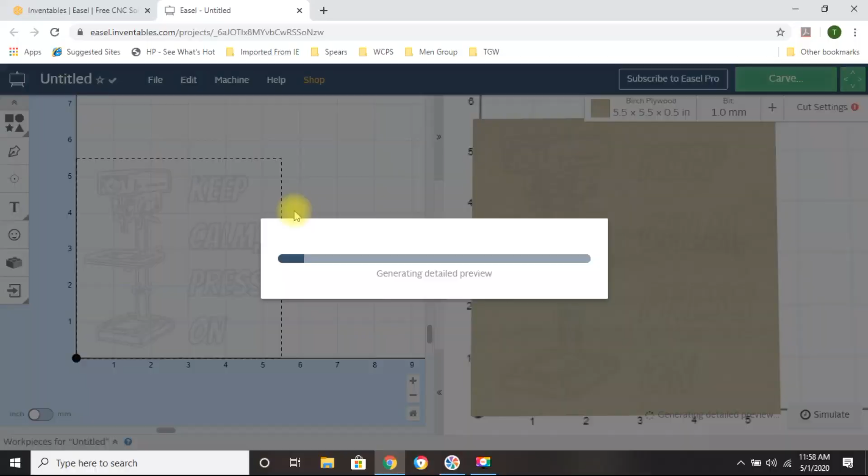Detailed preview. So yeah, that's what it will look like when we go to cut it. And so if I were to go ahead and carve this, what I need to do is, you see how it's got a red exclamation point? Excuse me.

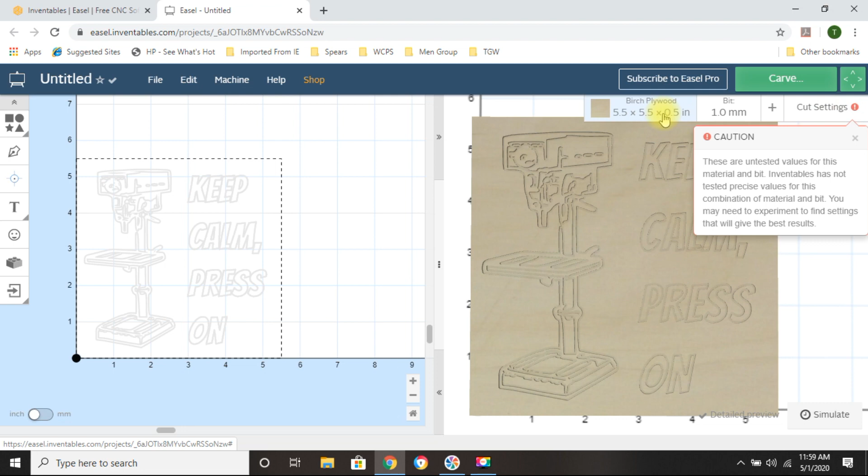So what that's telling you is that Easel says the values that you have in the boxes are untested, and so they're just saying, hey, you might want to look at this because we don't know what bit you're using. Whereas if you use one of the suggested bits that Easel has, say we were going to use the 1/8 inch single flute end mill.

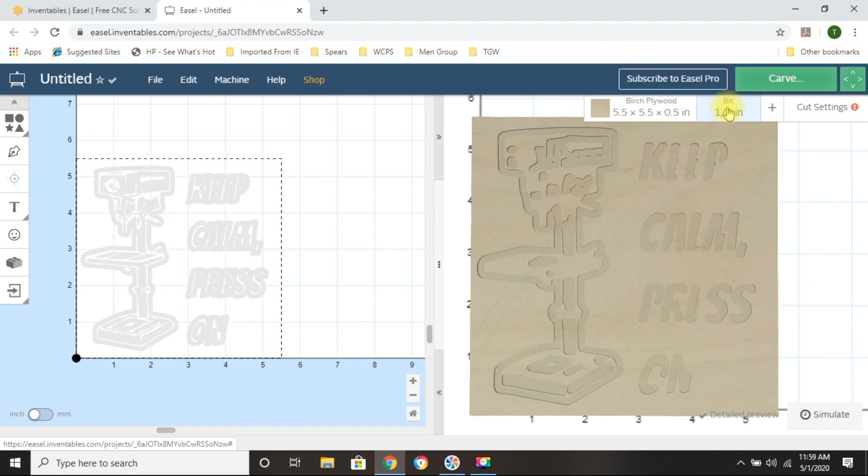Yeah, you see how, yeah, that ain't going to work for me. Still there. Yeah, it's telling you that it's not liking the bit, but I always just put that as 1mm, and then I come in here, and so if you're using a Pro 3018, these settings are meant for big machines. The Pro 3018 can't do this. You're gonna burn out your motor and break your device.

So you come over here, you click on the custom part. I usually back this down to about, let's go 20. I usually cut this in about half, but I will put it at about, let's do 4. Why not 4.5? Why not? And then the depth per pass, I usually keep where it's at.

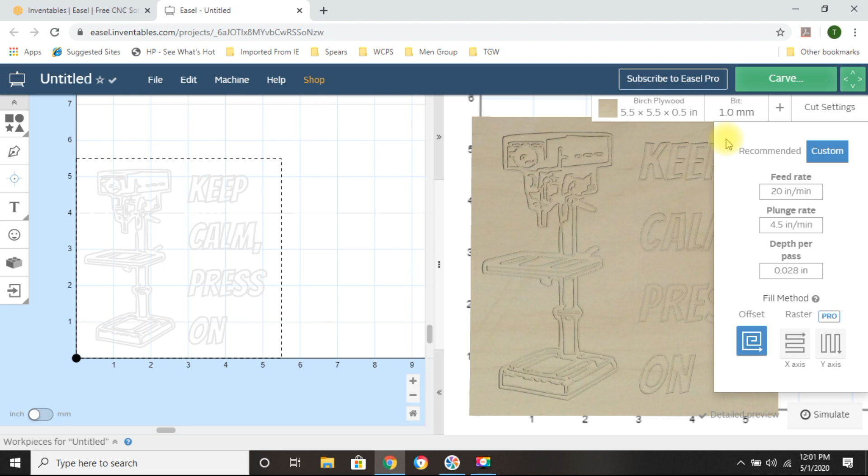The next thing you can do is you can decide if you want to use offset, so it starts in the middle and works its way out, or you can have it so it just starts on the x-axis and goes all the way and comes back. I usually just leave it as offset, and then the y-axis where it would go up and down, you got to pay for that. So yeah, that will do that. So we're going to keep our customs.

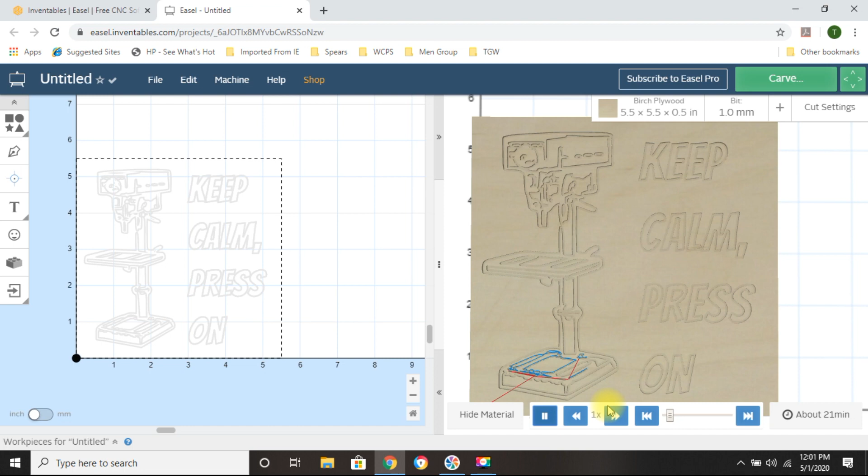Now next thing you can do is simulate to see how long it's going to take for this to cut. So it's saying about 21 minutes. You can actually play how it's going to cut. If you want, you can speed it up to see exactly where the tool is going to go. Let me speed it up. So yeah, this drill press has a lot of detail to it, but it looks really cool once it's all done. And boom, it's all done.

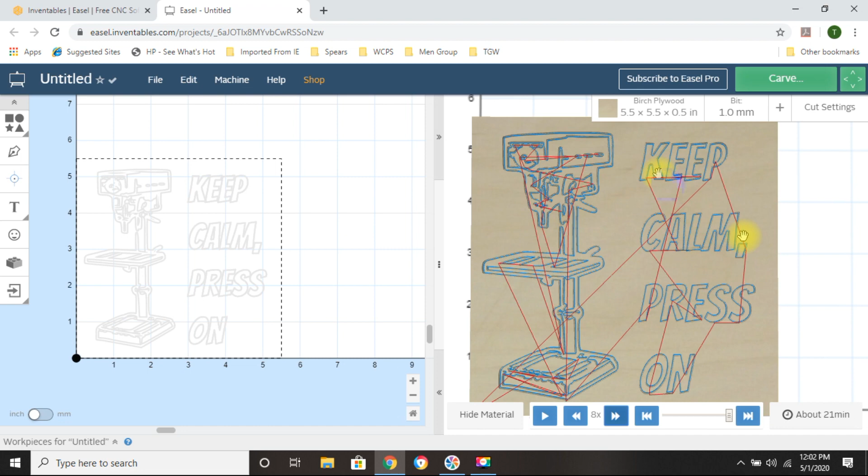Alright, so if I wanted to go ahead and carve this, I would go up here and click carve. Now I don't have anything on my CNC machine, but I'm still going to show you. So you're going to measure your material. You're going to make sure that the material is the exact thickness. I usually just put 0.5 inches. The material is actually 0.75, but once again, I'm not cutting all the way through, so I just put it as 0.50.

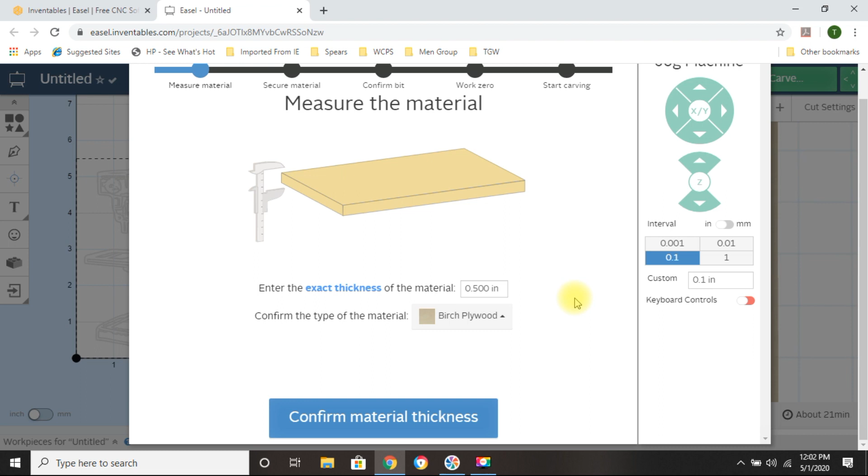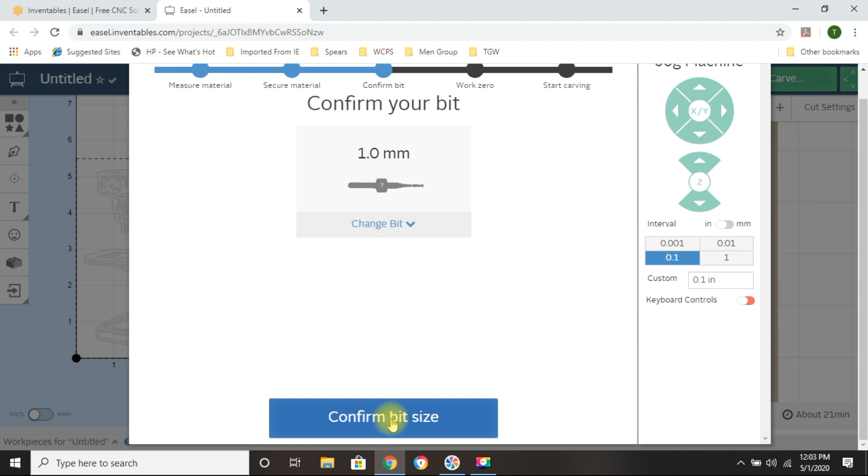Make sure your material is secure. Once again, it's going to want you to confirm what bit you want to use. We're using a customized 1.0mm bit. So you can confirm your bit size. And then what you'll do is you'll jog the machine to the lower left part of the material, and that's the work zero.

Once you got that, you can confirm. Oh, this is where you can determine how much you want that single jog to do. So you can have it move just very little. You can have it move a whole inch if you wanted to. I usually start off with 0.1, and then once I get close enough, when I do the Z, I'll go down to 0.01, and I'll really get it right to where it's touching the material. So, all right, back to what we were doing, squirrel.

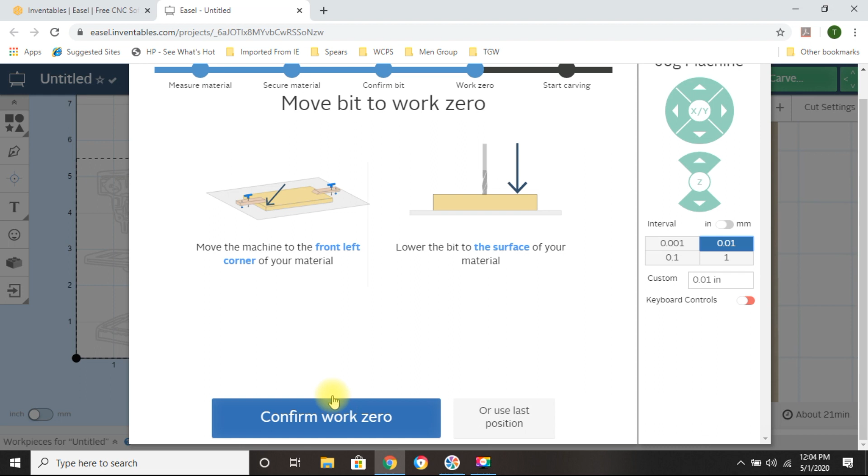Confirm work zero. So then you're going to raise the bit. You're going to tell the machine to turn on the spindle. And you're going to indicate that the spindle is on. And then when you're ready, you click carve. But like I said, I don't have any material on there. But if I were, it would start carving.

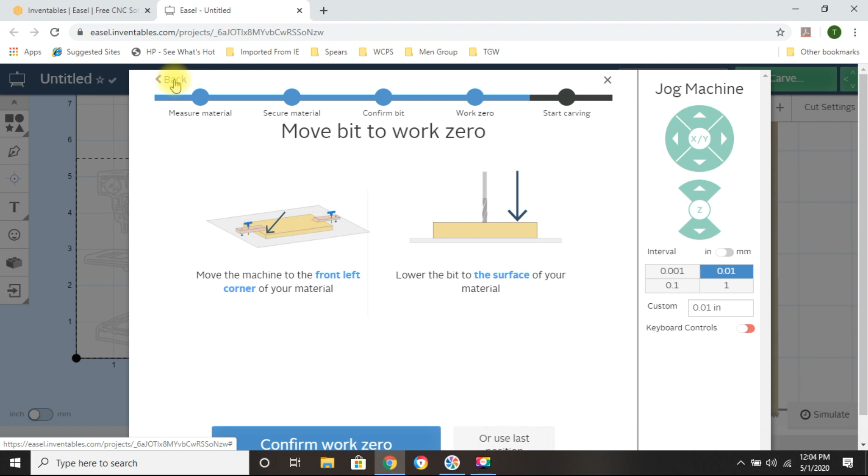Now, if you make a mistake, say you need to go back, you just go back to where you believe you made a mistake. And you say, oh, wait, my material's not secure. All right, material secure, confirm bit size, confirm work zero.

Why didn't you turn off? This is unedited. There it goes. But you can go back and say if you're not at the start carving point and you make mistakes from here, you can go back and the machine won't continue to run like it was. But if you need to shut it off, just press the X button.

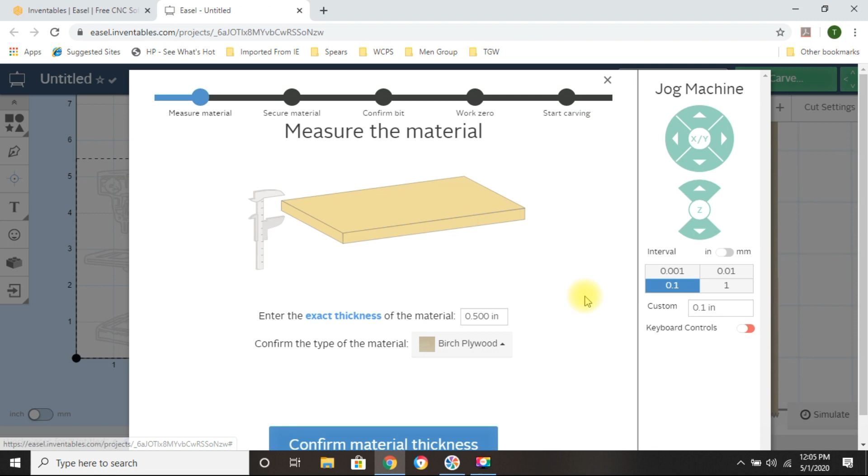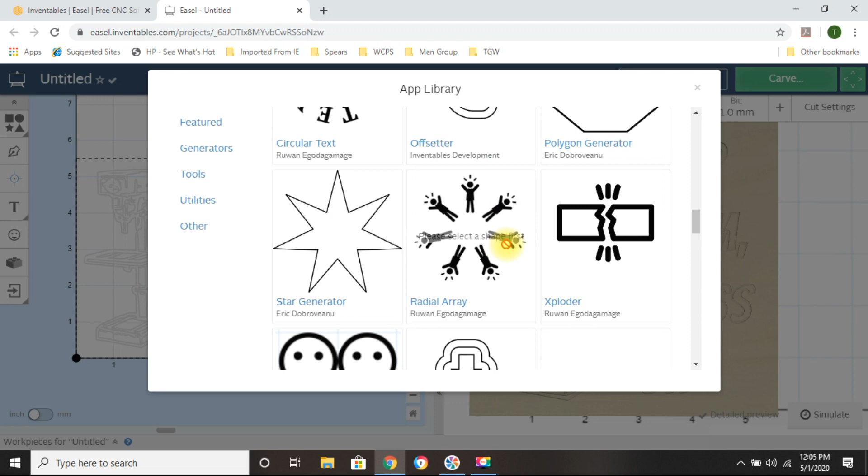So that is just kind of the basics of bringing in an image into Easel and setting up how you want it to cut on your project. The other options that you have with Easel, I've done a few. I've played around. They have different apps that you can use, and I've done the border one where you type in. Let me find it. Equal spacing. That's a good one.

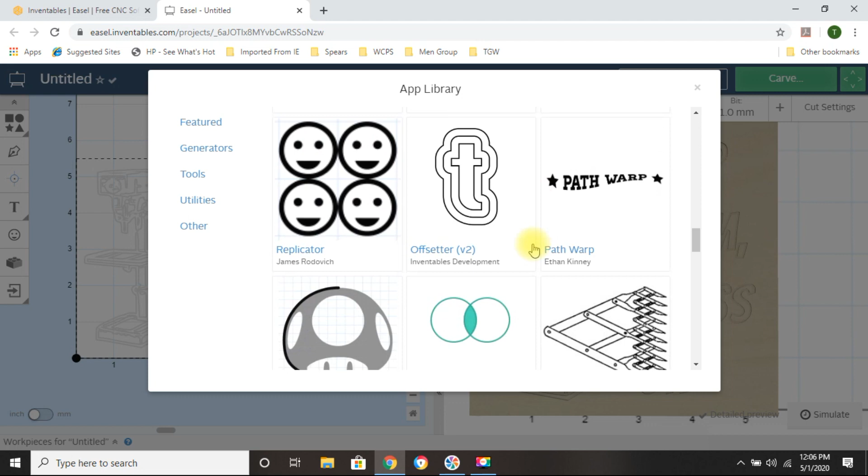So say I wanted to make sure that this right here has equal space. Say I were to do the words individually instead of doing it all in one text box. What I would do is I'd go to apps and I would come down here and I click equal spacing, and like I said, if it wasn't one text box, then it would have all the letters or the words listed, and you can tell it, okay, I want the spacing direction either vertical, horizontal, or both, so you want it all lined up. Spacing type on the center, space between, and then you can add additional spacing if you want.

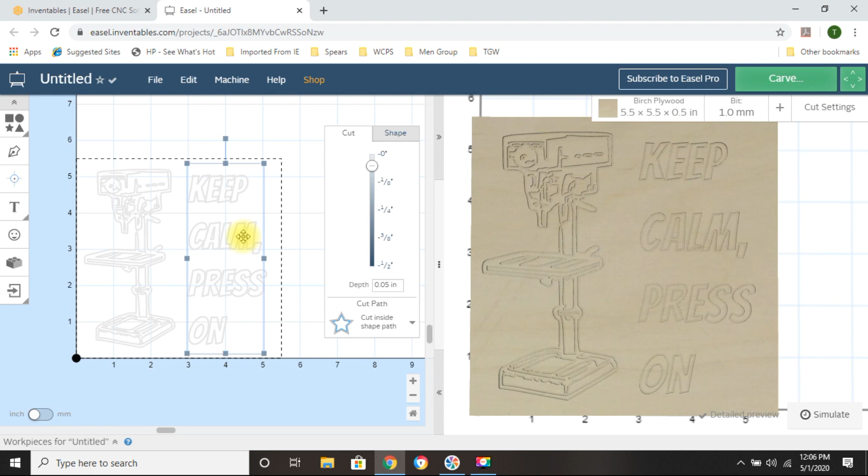And then once you have that all done, then you click on the import, and it'll bring that in spaced out perfectly, and then you put it in your piece of wood where you want it to cut. But yeah, there's a lot of different apps. Easel's so user friendly, that's why I love using it. Some people use other software, but Easel's just so much easier to use.

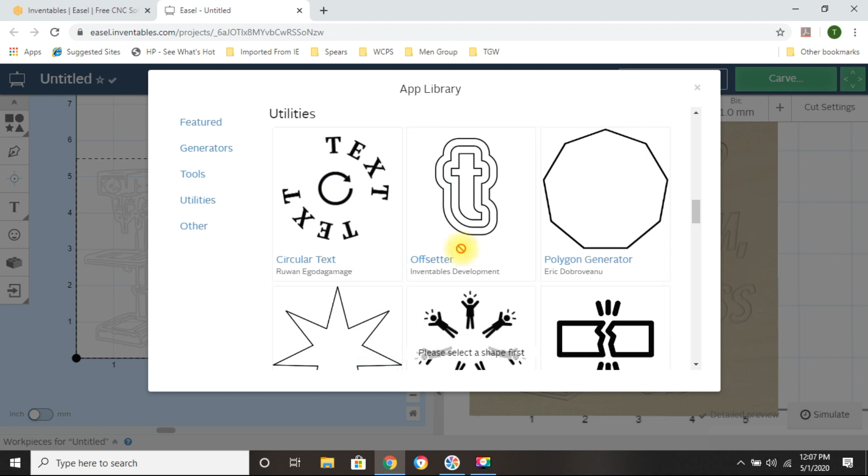Also, if you run into any issues, you can contact support, and they're pretty good about getting back with you. But if you did not purchase the X-Carve or one of Inventables' products, they can help you with the 3018, but you're better off contacting whoever you purchased the 3018 from. But if you're using an X-Carve, you can contact their support and they can walk you through on why your machine is not doing what it's supposed to be doing, or if you have a software issue, they can talk you through on how to get through that problem. I've had to email them in the past, and like I said, they're pretty quick.

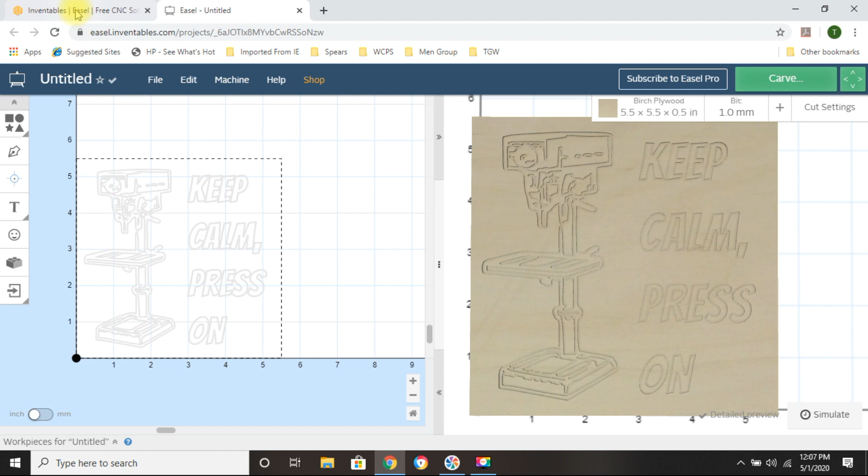Plus, they also have a forum, a community forum that you can go to, and it has all these different categories, specifically the X-Carve, different projects that people have listed. Yeah, you can go on here, and so different little projects people have done. Let's see if I can find it, if I remember exactly where it's at. So here are projects that people have actually uploaded, like, hey, check out what I made, and if you wanted to do it, let's say gifts for her, you know, Mother's Day's coming up, honeycomb candle holder, why not?

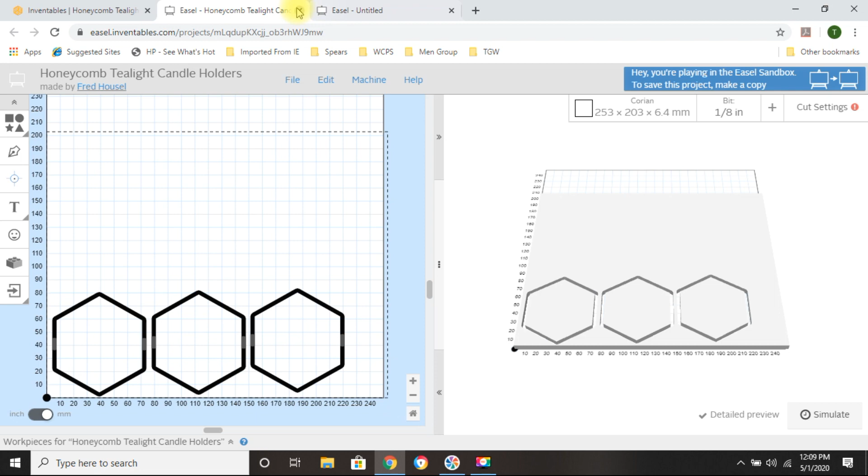So it'll show up, all right, this is the image, and they'll tell you what material they used, and you can be like, you know what, I want to open this in Easel. So you'll click open in Easel, and it'll open it up with exactly the settings that they had and how they cut it, and you can make these honeycomb tea light candle holders. So it's really cool. It's a lot of fun to play around with, and at first you're going to struggle, but the more you practice, the better you'll get. You know, that good old saying.

So yeah, that's just a quick little introduction into Easel. There's so much more you can do.